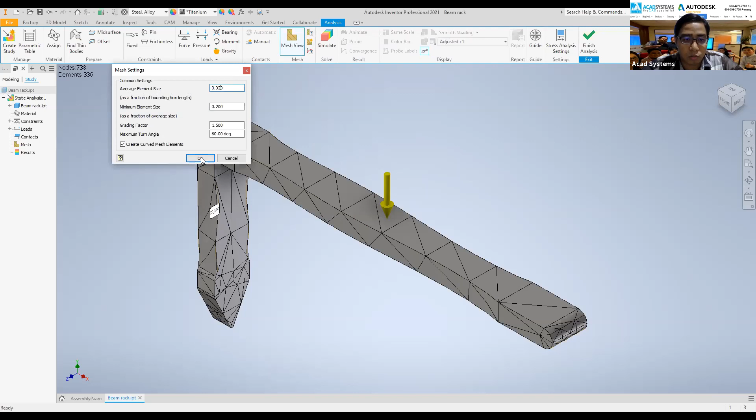Kalau you nak run dia punya simulation agak slow lah. Kalau yang lagi besar dia punya mesh, lagi cepat dia run, cumanya result dia tak berapa cantik sikit.

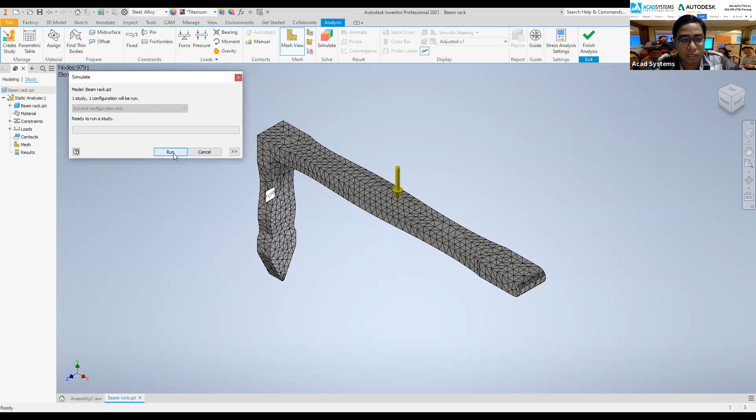Saya akan run from here, and then dia akan dapat result kat sini. Dia akan bagi start from Von Mises stress, ada principal stress, tapi yang most likely yang you nak tengok will be under displacement dengan safety factor result kat sini.

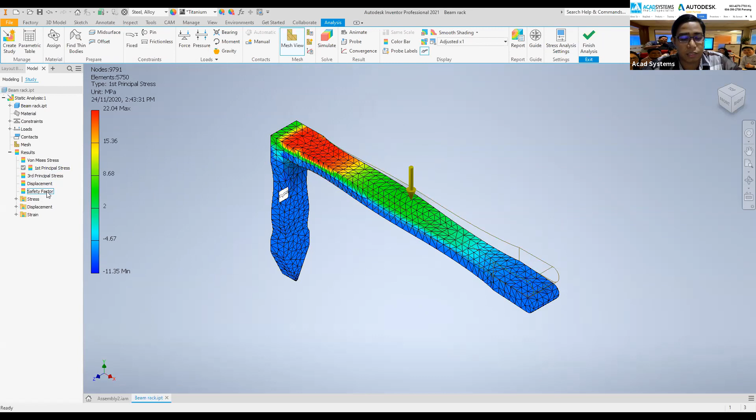Let's say saya pergi dekat safety factor. From here, you boleh tengok dia punya safety factor based on dia punya color kat sini, dia punya value. So the highest safety factor will be 15. Kalau you tengok kat semua ni dah jadi warna biru, maksudnya part ni memang safe lah.

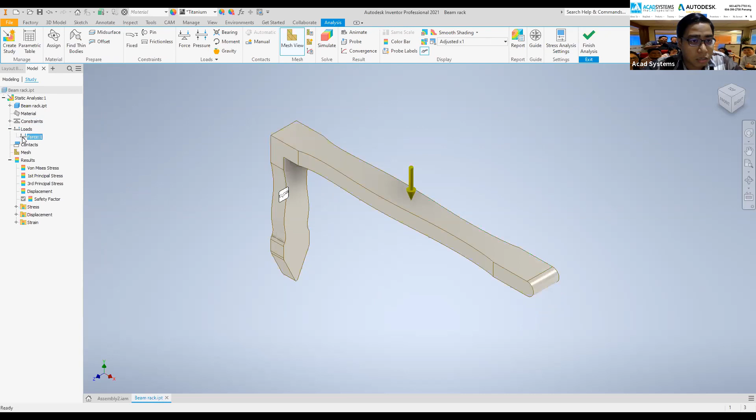Kalau saya tukar sekali lagi dia punya load. Okey, tak apa, kita biar aja load dia 2000. Kalau kita pergi balik ke safety factor, paling lowest for this adalah 7.83.

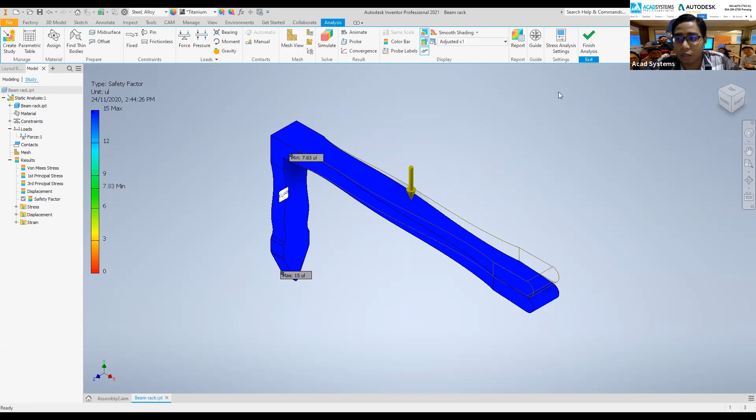Which means somewhere around, you boleh juga pergi dekat display and then pilihlah. So this will be the maximum. Pilih untuk minimum, dia akan highlight dekat mana minimum area dekat situ. So this will be the most smaller safety factor. Tapi 7.8 should be okay already.

Kalau you still nak tengok dia punya based on color, so you juga boleh filter lah. For this case, color dia daripada 15 ke 0. Maybe you just nak filter daripada 15 ke 7.

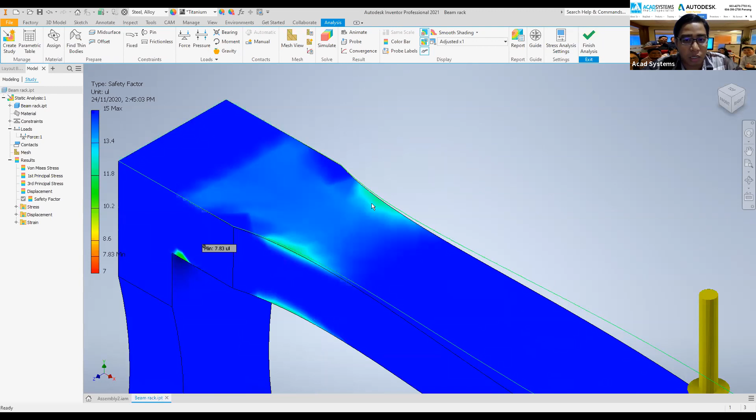You boleh pergi dekat color bar. From here, you boleh adjust manually dia punya color variation kat sini. Maybe saya letak 7 kat situ. Tekan apply, so you boleh start nampak lah dengan lebih senang dekat mana dia punya location based on color tu.

Moving forward for displacement. Just double click saja. Kita akan dapat dia punya displacement result.

So this will be dia punya displacement lah. You boleh nampak dia punya actual adalah from this line over here. So this will be the deformation result. Tapi kalau you tengok kat sini, kalau based on dia punya safety factor, actually very safe.

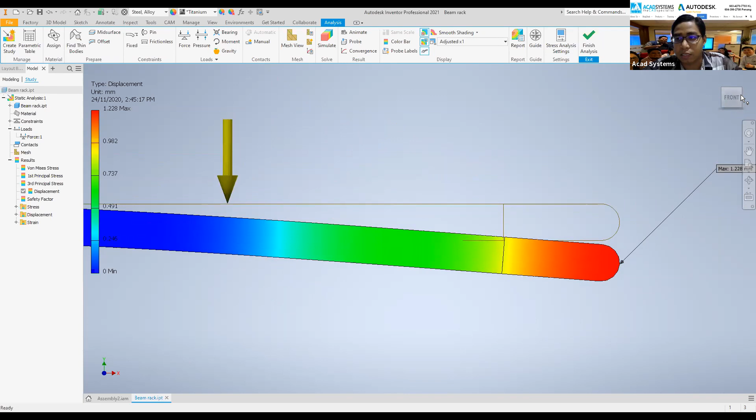Tapi kenapa dia punya deformation terlalu banyak kat sini? The reason why dia jadi macam ni sebab this one actually just an exaggerated result. Dia just multiplykan dia sahaja.

Kalau you nak tengok macam mana dia punya actual deformation, boleh pergi dekat under display. You boleh drop down kat sini, tengok actual. So this will be the most likely what will happen in real life. Right? So susah sikit lah nak nampak.

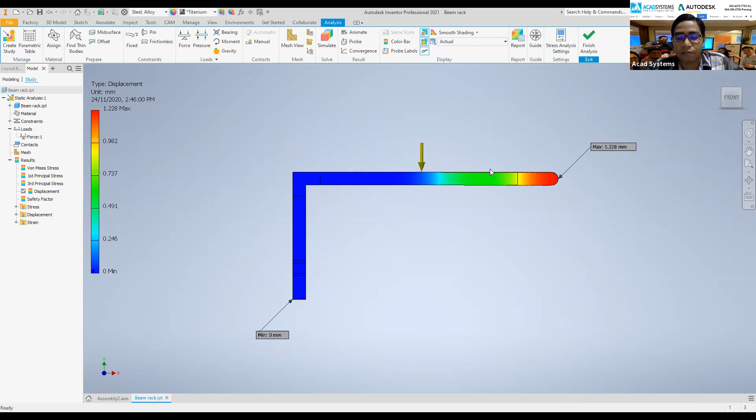So you boleh zoom in, and then baru you nampak. So ini adalah dia punya actual line kat sini. Dia punya maximum deformation just 1.228 saja under displacement. 1.228 mm, quite small, sebab tu dia bagi

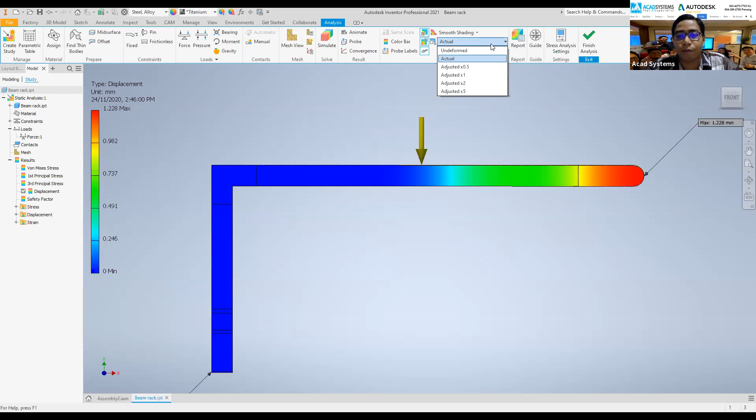exaggerated result, sebab senang nak nampak dia punya dekat location mana yang dia deformation happen dan juga dekat mana direction dia berlaku. So you boleh just nak tengok exaggerated pun boleh.

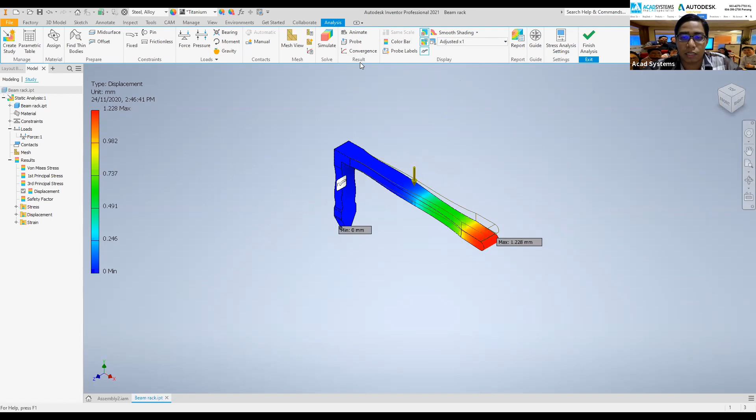From here also, you boleh juga nak tengok dia punya animation. Boleh pergi under result, ada animate dekat sini. You tekan play, so dia akan bagi animated punya simulation lah.

Dekat sini juga, you tengok dekat sini, you tengok dia punya value. Hujung sekali 1.228 mm dia turun. Let's say you nak tengok somewhere around here ataupun somewhere around here.

Under result, you boleh pakai probe, then you boleh just letak saja. Dia akan ambil daripada point tu dan baca dia punya deformation result.

Dekat point sini adalah dia turun lebih kurang 0.687. Belakang ni 0.229, depan sikit something macam tu. So you boleh pakai probe untuk nak tahu lebih lanjut lah dekat mana dia punya location tu happen.

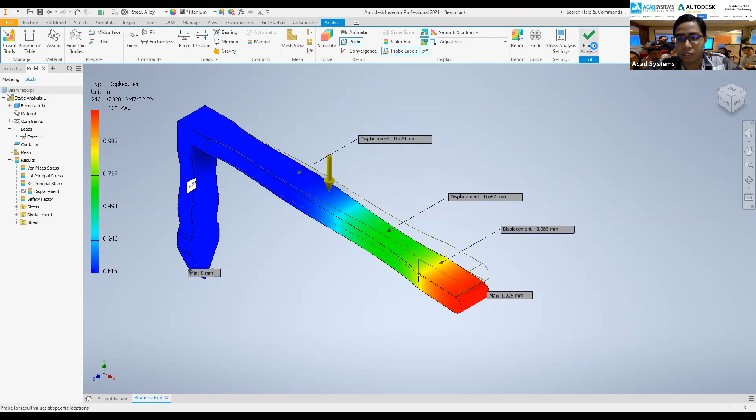Now, let's say lah you tak mau dia punya displacement dia turun 1. You nak lagi increase dia punya ketahanan ni, you tak mau dia turun below than 1, you tak mau turun more than 1. So you boleh just finish analysis and go back to our 3D model dan buatlah sedikit modification dekat part ni untuk dia lagi tahan.

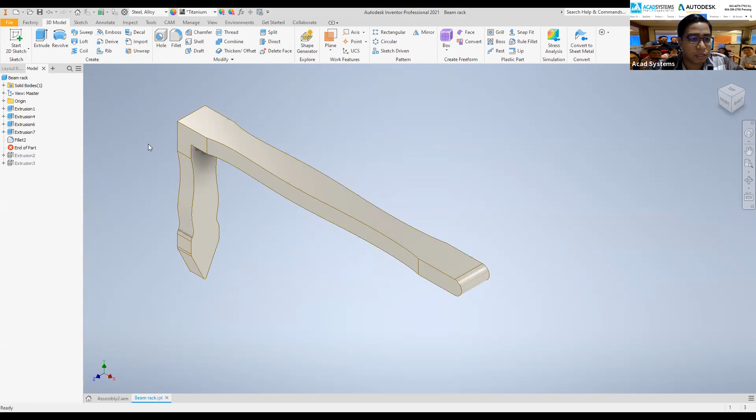Right, from here, so saya boleh just edit. For this case saya dah edit awal-awal, so saya just ubah saja. So bagi ada balik, the newest edit yang saya buat dekat part ni.

Dan kita boleh just masuk balik dekat stress analysis. Okay, so the mesh already have, tapi kita just nak tengok, kita nak simulate balik, including yang bawah ni sekali. Sebab dekat atas ni, dia just bagi mesh untuk yang atas ni saja.

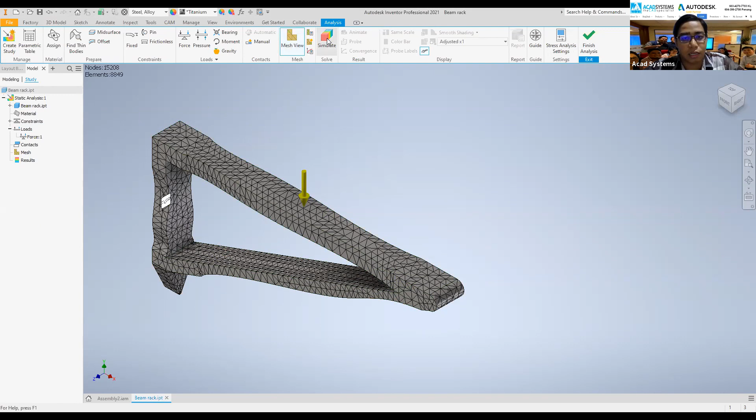So apa yang kita boleh buat, kita boleh just simply pergi dekat mesh dan update sahaja. Dia akan update semua sekali, run sahaja simulation lah. Senang saja, you tak perlu nak apply balik dia punya constraint, dia punya load. Boleh just continue macam tu.

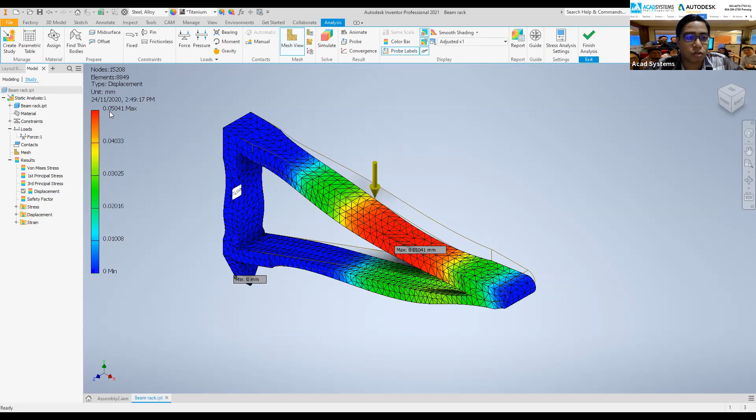So this will be the newest result lah. Boleh pergi kat displacement, you dah boleh nampak kat sini dia punya displacement dah kurang, 0.05 sahaja dia turun. So kalau you tengok actual, somewhere macam ni lah, tak nampak langsung.

So that will be the stress analysis. You can apply your pressure, moment, all of that there.

Continue further, let's say you want to look at vibration analysis. That will be under modal analysis. So I will drop down here and create new studies, and I will use modal analysis.

From here, the number of modes is the number of results that we want. For this case I want 10 results. I select 10 and okay.

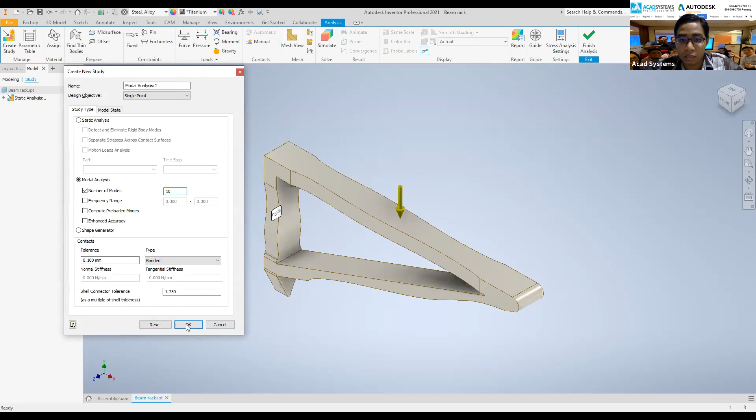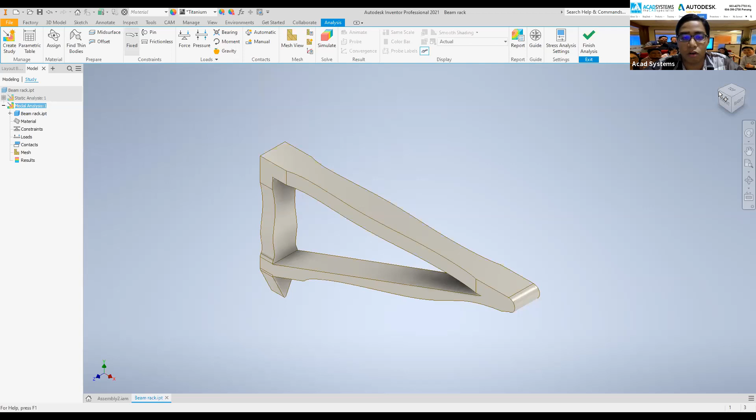So we've applied the modal analysis. We need to apply back the material - this one already has it. Apply the constraint: fix at the wall, apply just that. Then for modal analysis you don't need to apply load, because there's no connection between load and vibration, which is the modal analysis. So we leave the load alone. We can proceed just to mesh.

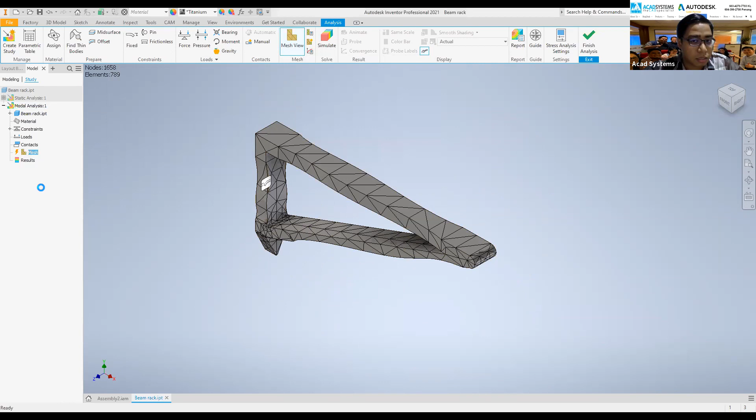So again I want to set it to 0.02. Then I can just simulate.

So this will be the result for vibration, which gives the result based on frequency. On the first frequency, the lowest one, which is 77 here, it will move something around here.

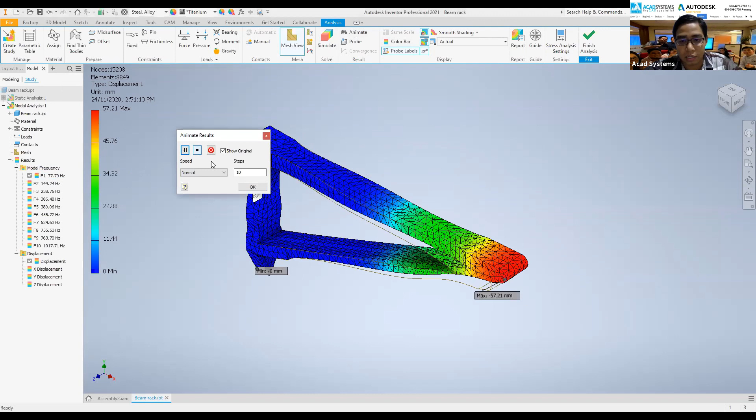We can look at the second frequency. This will be the second frequency, which is 146. Under 146 it will move like this. Under the next frequency, this deformation happens.

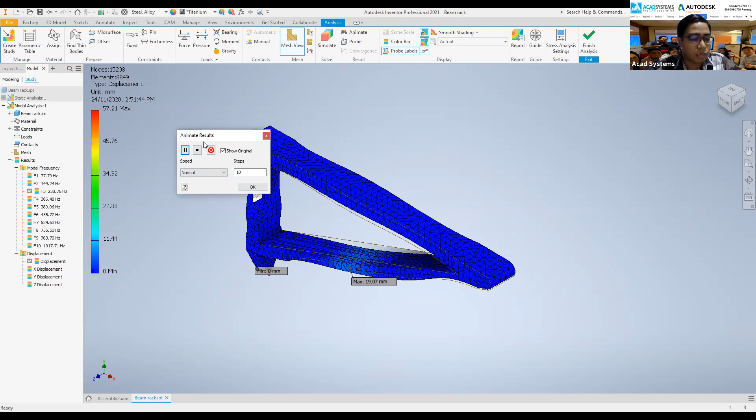Now maybe you're wondering why it gives results like this. Like the first one moves like this, and then the second one moves like this under a different frequency. Why does it give results based on frequency? Let's say the first one should move like this, and then under frequency 77, it gets a result like this.

Let's say in this direction we also apply more than 77, maybe we apply 450. Will the frequency, will its movement or vibration become worse? The answer is no.

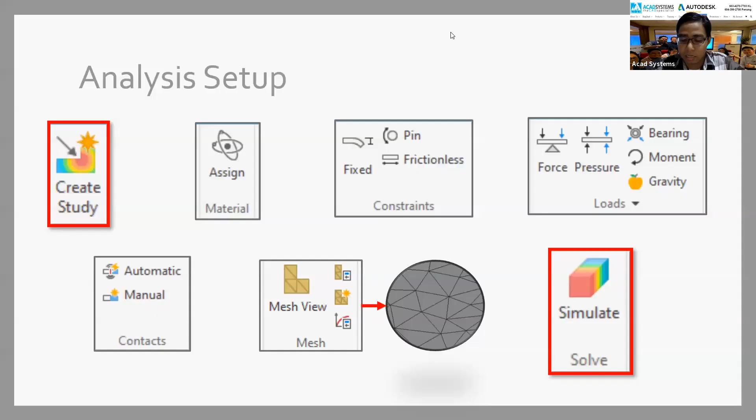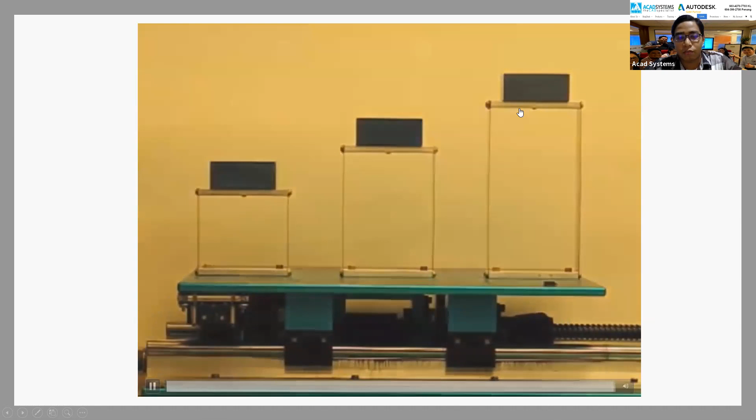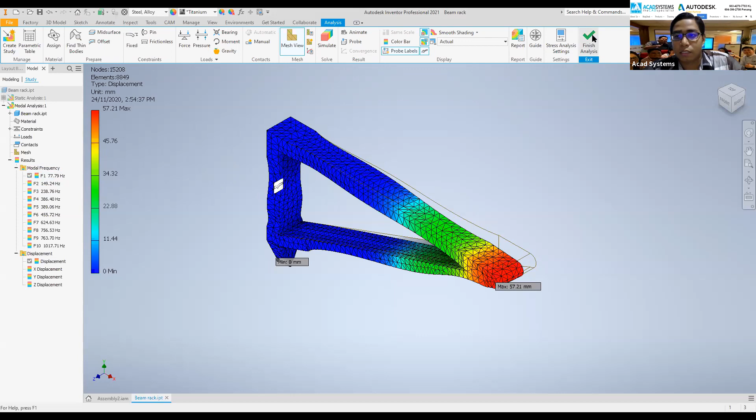Let's say you want a result above 100 Hz frequency here. You can just, like before, finish and edit here. So I will add one more part here, go into stress analysis and rerun the mesh.

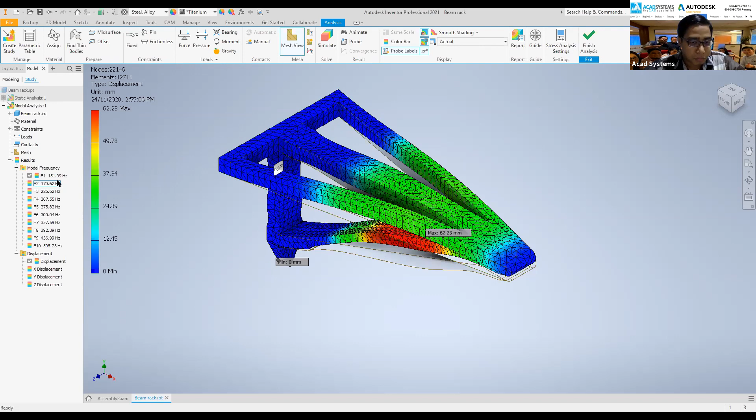So that is all for the frequency and the static analysis. If you have any questions, just write them in the chat. I will try to look at them. So I will open for Q&A session.

The first question: can modal analysis tell us about natural frequency? I believe this one can - it will just give many results. You need to analyze yourself based on the hertz values. Let's say you want to mount it on a mobile truck, something like that. So when the truck moves, it will have a frequency there, let's say around 100, 120. So you design your part so that it only happens above that frequency.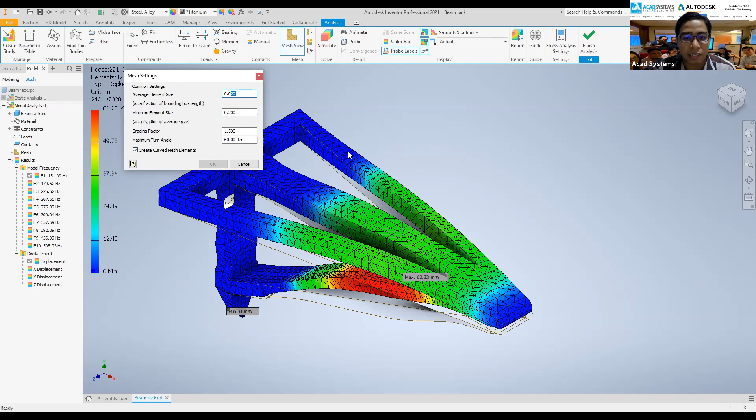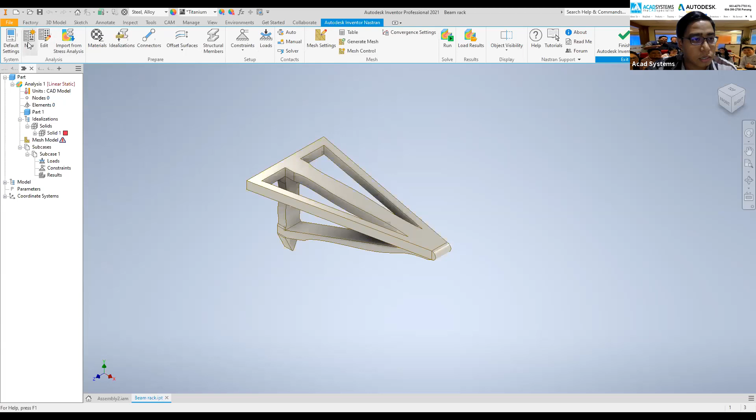Right, so for fatigue analysis, I believe Nastran boleh. Saya akan cuba check tengok for fatigue. So this is the Nastran. Okay, so fatigue analysis ada somewhere around here. So you boleh, kalau you ada Nastran, boleh cuba main tengok dengan mana ni.

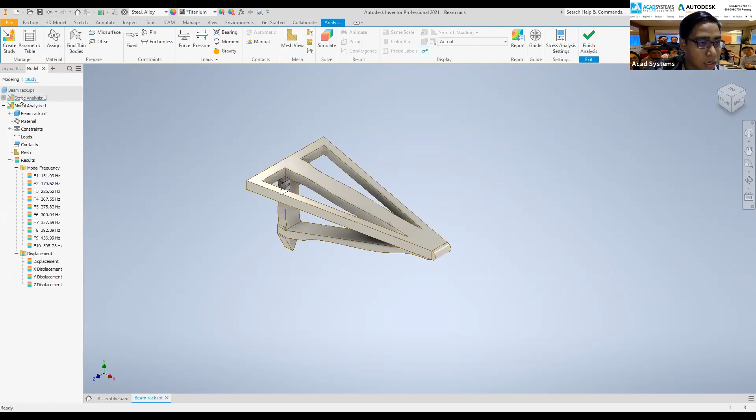Right, so kita ada another question, what is grading factor? Okay, I'm not sure what you mean by that. Saya akan cuba masuk balik. Adakah you punya grading factor tu maksudnya adalah dia punya warna dekat result ni? So do you mean by this result? Okay.

Alright, so mesh setting, grading, fraction of average. So actually I'm not sure about this lah. So saya akan cuba search tengok nanti. For Syahrul Zaman, so you boleh just bagi you punya email. Nanti kalau saya dah dapat dia punya answer, saya boleh email bagi you. Tapi yang most important, you kena set dia punya element size lah.

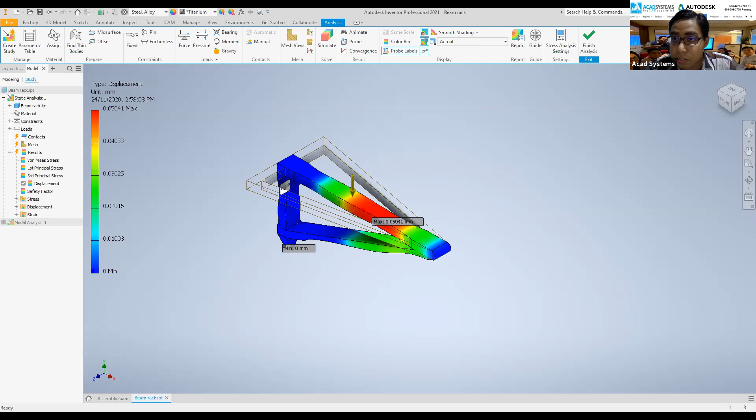But for contact ni, kalau you ada involve macam assembly, baru dia pakai ni. Sebab dia nak tengok contact between each part, baru you akan apply lah contact. For this case, kita tak apply contact sebab kita just ada satu part saja.

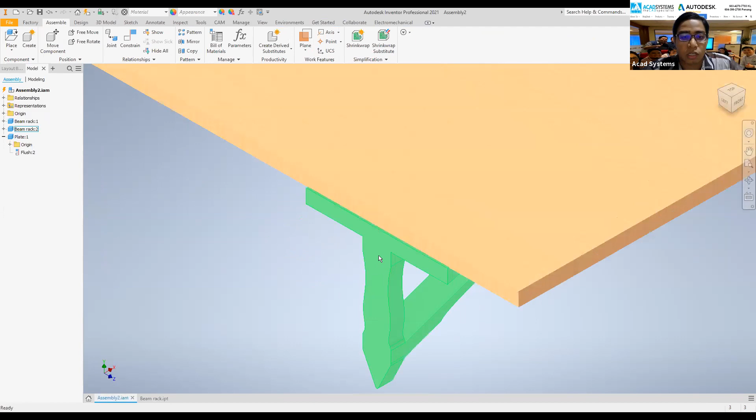Right, so the setup yang kita kena apply firstly adalah setup dia punya material, and then setup dia punya constraint dekat mana part tu yang dia takkan bergerak lah. Contohnya part ni, contohnya saya share balik. Contohnya part belakang ni, ni dia connect dengan ini. So this would be dia punya constraint.

So the next is dia punya loads, so dia punya force pressure, and lastly adalah dia punya mesh. Okay, so tak banyak benda yang perlu apply. You just boleh run saja analisis dia.

Okay, another question. In modal analysis, the frequency range is automatic? Yes, for actually dia punya range dia, kalau you nak tengok dia punya berapa result, so you boleh. Right, so untuk you nak run for modal analysis result dia, number of mode you boleh apply dekat sini.

Number dia berapa banyak result yang you nak. You nak 5 saja, you letak 5. You nak 15, letak 15. Nanti bila you run, dia akan keluar, dia akan automatically cari lah 15 yang paling low, paling low dan ke atas.

Right, so then another question. In stress analysis, should we consider gravity as self-weight? So most likely that from my experience, we don't actually use lah much of the gravity, so you boleh ignore gravity. So most likely you akan pakai force lah. So you nak cuba dengan gravity pun boleh, so based on accuracy for your part lah.